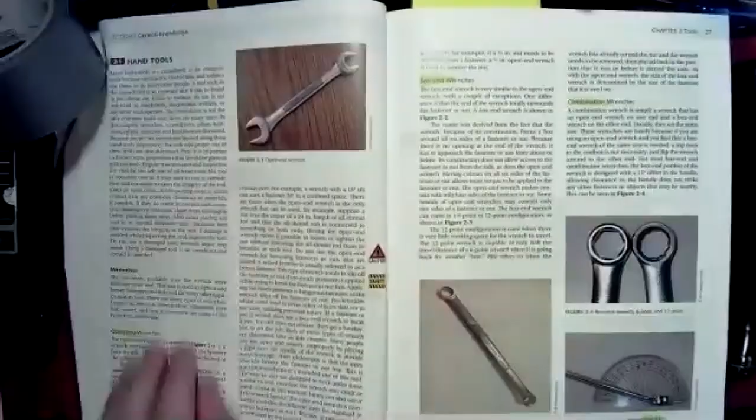Let me move my junk out of the way. Oh, I forgot one other tool which the book doesn't go through.

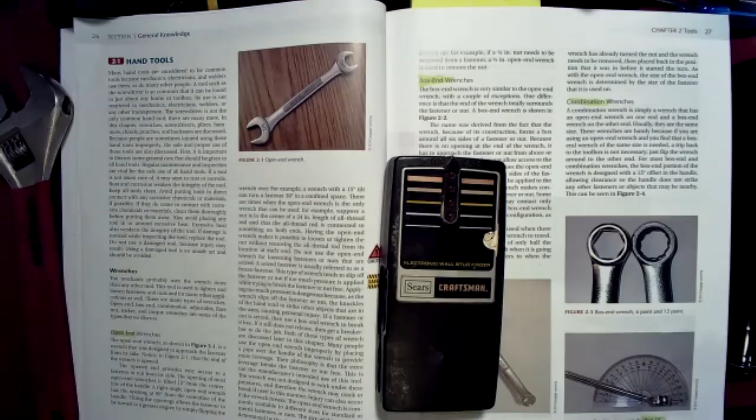Electronic measurement devices - in this case, this is a stud finder. This particular stud finder was purchased from Sears probably before most of you were born, probably in 1978, and it's lasted and done a really good job. There's a variety of electrical tools like the stud finder - voltage finders and so forth that we're not going to get into in this course, including voltmeters, which is a vital tool for all of mechatronics. But you're going to get into that in other courses, so we're not going to touch that here.

Number one, wrenches. If you're a mechanic or doing primarily mechanical work, a wrench is absolutely vital. If you only occasionally do mechanical work, you may not want to invest in your best set. I don't invest in my best set of wrenches - both the open-ended wrench, that's a wrench with an open end, here is one, and a box wrench, that's a wrench with a closed end, like these over here. The only time I find myself using my wrenches regularly is when I'm doing automotive work, and frankly that's only occasionally, when I can't get into a spot in my vehicle with a ratchet socket head.

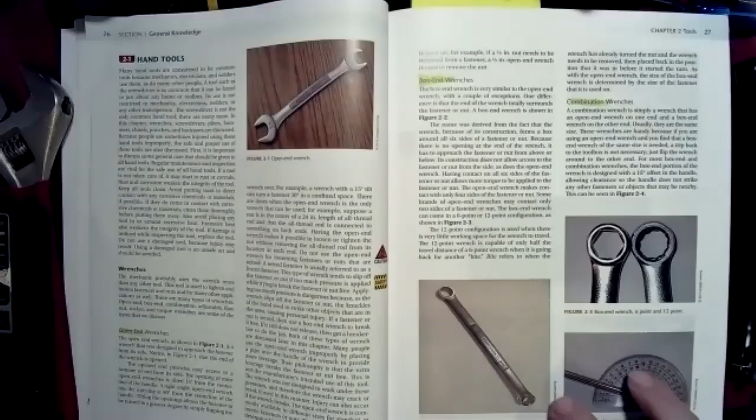Even though I do have a good set, it's not critical to buy right away. You may want to hold off on spending a lot of money. Buy yourself a basic set of English and metric and call it good until you get into your job situation and find out. The one thing I will mention about wrenches is it's very useful when tightening down on a flat surface to have this 15-degree offset. A lot of standard wrenches don't have that - they're flat. This will save your knuckles a lot of damage, keeping them off the surface when tightening against a big flat surface.

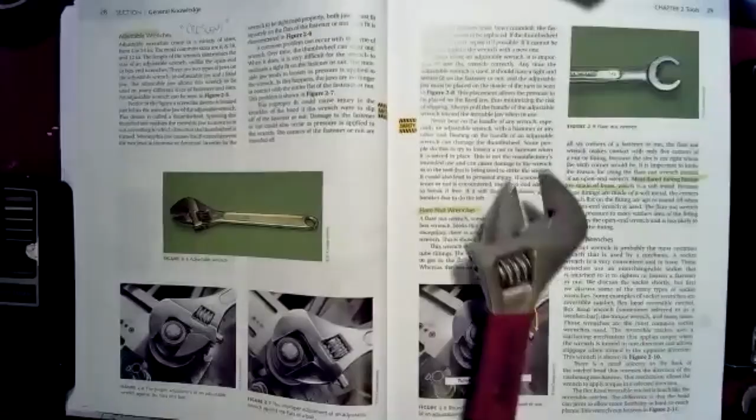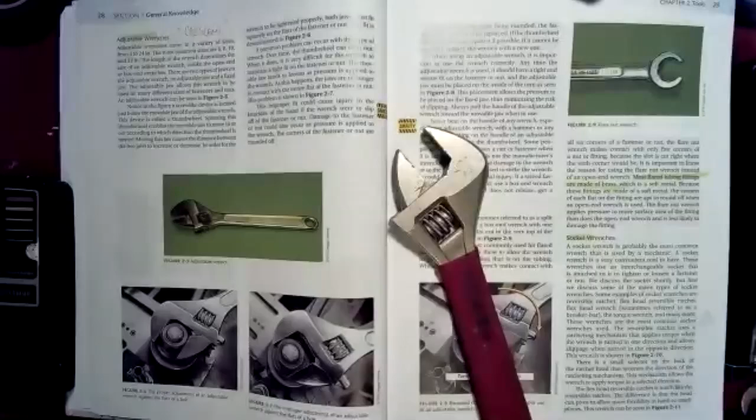Adjustable wrenches are absolutely vital. In fact, having a good quality adjustable wrench in your toolbox is critical. I've found that I like this particular brand - I don't even know, it doesn't even have a brand name on it. It's made in China and comes with these red handles. I've had this one for years and years, and I've abused it, beaten it up, used it as a hammer. You can see the dents in the side there. I've done everything wrong with this wrench, and it still works well on and on.

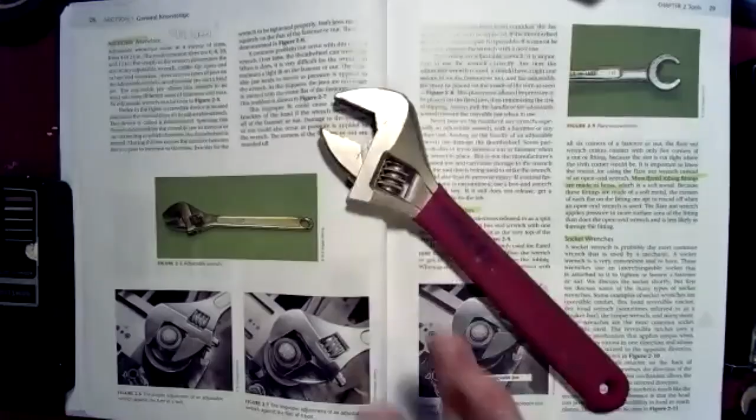We call these crescent wrenches, which is actually a brand name - they're not really all crescent wrenches. That's a brand name of a particular wrench I don't even think they make anymore. Mostly they're just called adjustable wrenches. Get yourself a good set - I have a small one, a medium, a large, and a very, very big one. If you're going to put one in your toolkit, I'd suggest one with a maximum opening size of about 1 inch and a length of about 9 inches on the handle. This is a really good toolbox size - this one's called Companion brand.

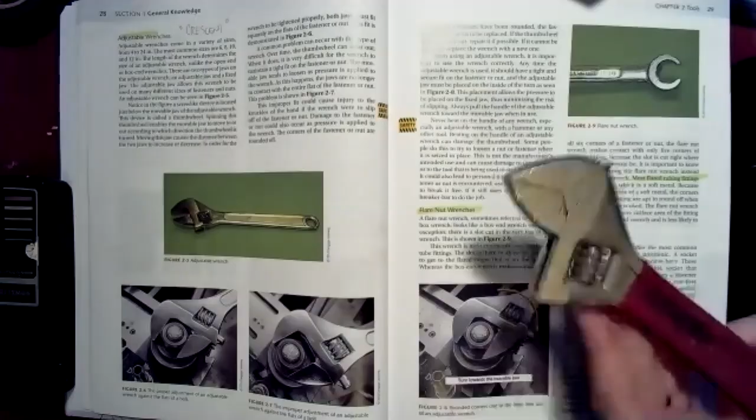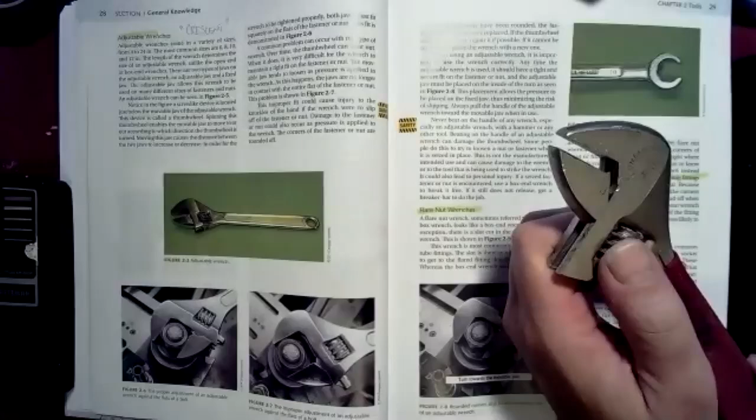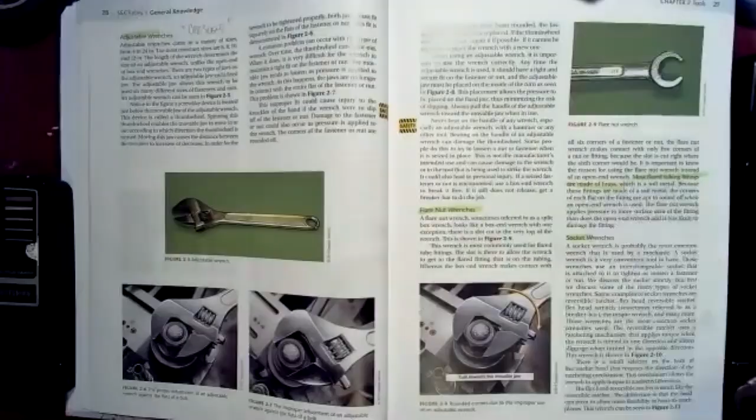So I like this wrench a lot, and I've abused it, and it keeps working well for me. The downside to a crescent wrench is you have to be careful to adjust it properly every time you tighten down on a nut or bolt. If you let it open a little bit bigger than the nut you're working on, it will potentially damage that nut, and the book covers some of that. Then there's some oddball wrenches - if you're doing plumbing work, you'll need a flare nut wrench, used for brass fittings, primarily in plumbing, both hydraulic and water. Read about that in the book.

A good set of socket wrenches is critical. I still have my Craftsman socket wrenches from 20, 30 years ago, and they work great. If you're doing automotive work, extremely high quality socket wrenches are absolutely critical and worth every penny for the best you can buy, if you're using them every day. I don't use mine every day - on the job doing maintenance work I might use them 2 or 3 times a week, but in my current workshop maybe 2 or 3 times a month. So I don't need the highest quality anymore, even though my old Craftsman still works pretty well. I don't value the absolute highest dollar brands like Snap-on. It's useful to have a really good quality tool that won't break if you're using it every day, but I don't see it as a smart move to buy the most expensive version of a tool.

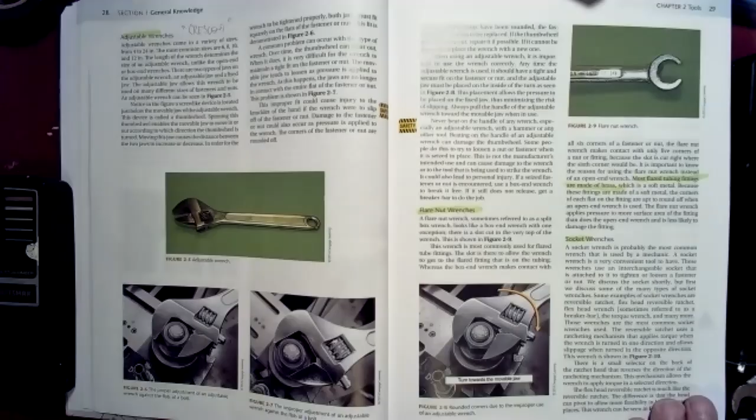A torque wrench. Very often you can get a torque wrench in with your socket wrench sets. A torque wrench is absolutely critical for doing automotive work anymore.

You want to make sure that you don't tighten down your spark plugs any more than their rated torque. Otherwise, you may snap the plug, or you may get it so tight down in the hole that you can't get it out again if you ever need to change it. So spark plugs are absolutely critical to get in right with the torque wrench. And virtually any part on an engine, and many other parts in your vehicle, are rated to be tightened down to a certain torque. So that lets you set the tightness to a particular torque value.

A lot of equipment now you buy, if you do any repair on it, you have to certify that you maintain the right torque. So this is not critical. This is in the third category where it's not critical. You don't always need it, but if you're doing mechanical work on vehicles or any kind of certified machinery, you will need this for your workplace.

I wouldn't suggest you buy a torque wrench right up front. I would wait and see if you really need it in your workplace. And to be honest, I currently don't have a torque wrench. I went looking for one the other day. I couldn't find it. So I'm planning to go replace my torque wrench, and I just haven't done that yet.

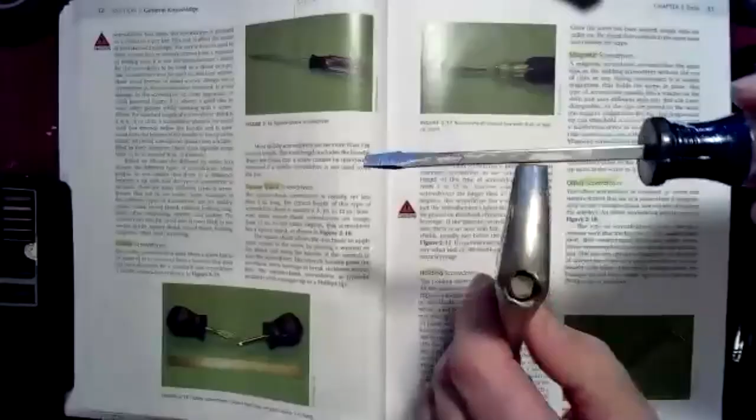So first of all, I'll go through what the book talks about with screwdrivers. The book hits the basic mechanics screwdrivers, which are your stubbies, your square shank, which includes your flathead square shank. Square shank screwdrivers means that you've got a square profile to the shank, which is the shaft of the screwdriver. That means I can put a wrench on that shaft and get a lot of torque on that screwdriver.

Now, that's also how I can screw up the tip. As you can see, this tip has just got a slight twist to it. It's not twisted enough that I can take it back to, I guess Lowe's is doing Craftsman now, and replace it, but it's just got a slight twist to it, which means that I torqued the snot out of this screwdriver at some point in its life.

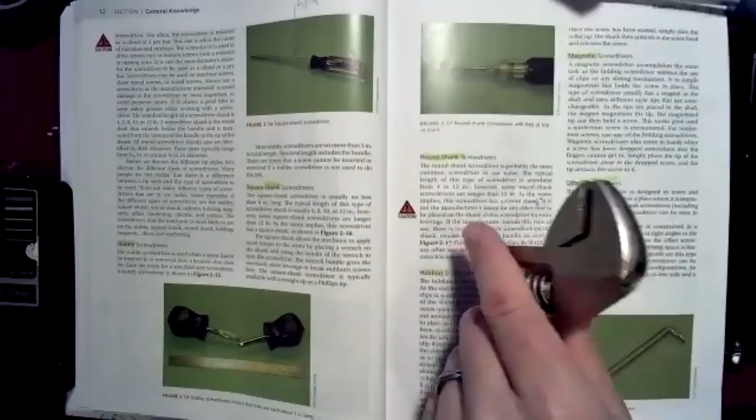A round shank screwdriver is the same kind of screwdriver, but you can't put a wrench on it. They tend to be a little bit cheaper, round shanked screwdrivers. Here's an example of round shank, and here's an example of round shank.

These particular screwdrivers are absolutely vital for the mechatronics world, and this one too. Having a really good, high quality, hardened steel, number 2 Phillips, round or square shank—in this case Phillips are almost always round shank—is absolutely vital. Many, many pieces of equipment have this particular Phillips head drive, that star looking slot, as absolutely vital.

Another thing you need is a tiny flathead screwdriver. Notice this flathead screwdriver has got a very narrow profile. That is used to work on terminal blocks. I can unscrew and tighten terminal blocks for doing wiring. So having a really high quality—in this case, it's a very high quality German screwdriver—specifically designed for either very small pairs of glasses or doing terminal block work, and having a very high quality Phillips head in that same size range as well. Very, very important. These are all very, very important to have.

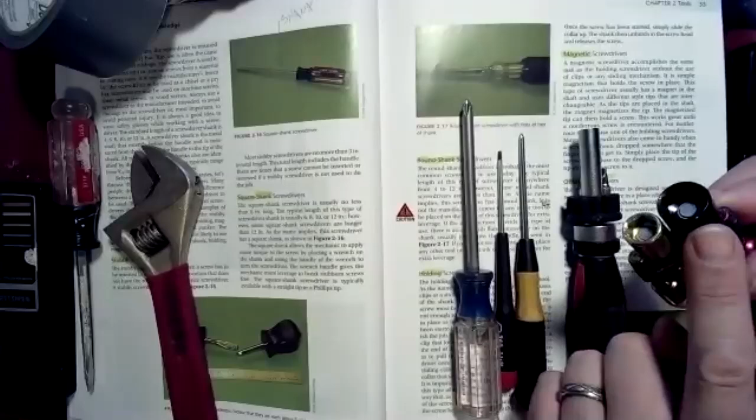And to go with that, you can get some socket head bits. I don't know that the book talks about them a lot—I think it mentions them briefly. These socket head bits are inexpensive, from I think Harbor Freight. They're easy to grab the right size based on the color, and they've got magnets inside so they can hold the screw or the nut that you're driving. If it comes out, it'll stay in the socket so it won't drop down inside your machine. Or if you're putting it in, you can pop that screw or nut into the socket and then install it. So that is very, very important from a screwdriver perspective.